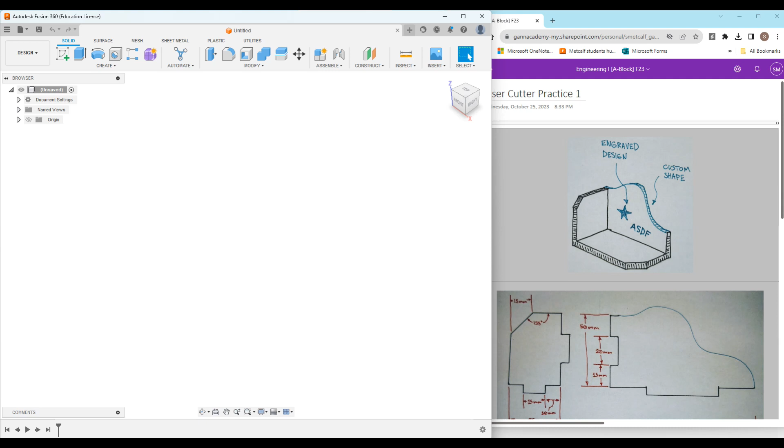In this video, I'm going to show you how to make a simple laser cut design in Fusion 360 using a technique that I call multi-plane sketching. Let's break that phrase down.

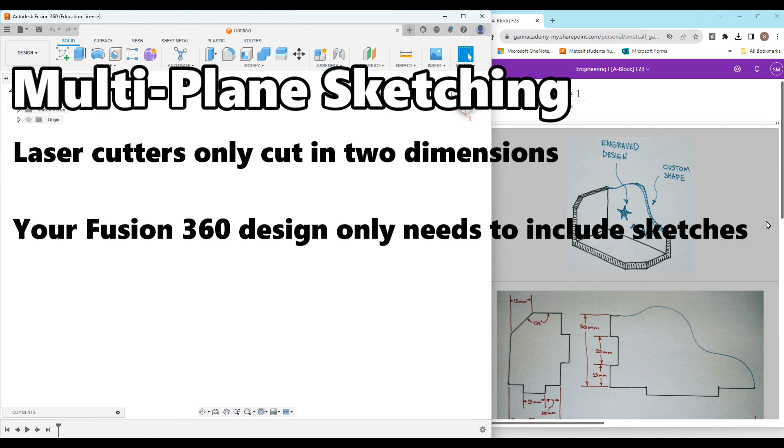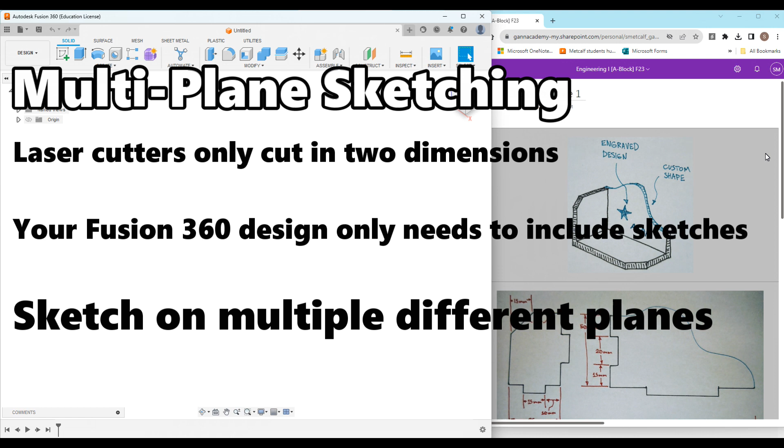Laser cutters only cut in 2 dimensions, which means that your Fusion design only needs to include 2-dimensional sketches. But when this design is assembled, it will be 3-dimensional because the parts do not all lie on the same plane. Therefore, when we design it in Fusion, we should sketch on multiple different planes, both so that we can see what it will actually look like and because this will help us make the design more accurate.

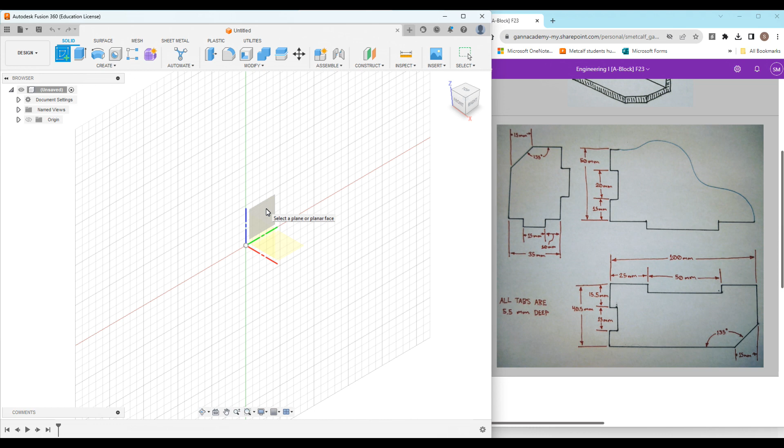You can see that the 3 pieces of this design fit together with tabs. Tabs are a common laser cutting design feature that ensures our pieces fit together in exactly the intended positions. I'm going to start in Fusion by creating a sketch on the YZ plane. In this sketch, I'm going to draw out the design for the left side panel of this assembly.

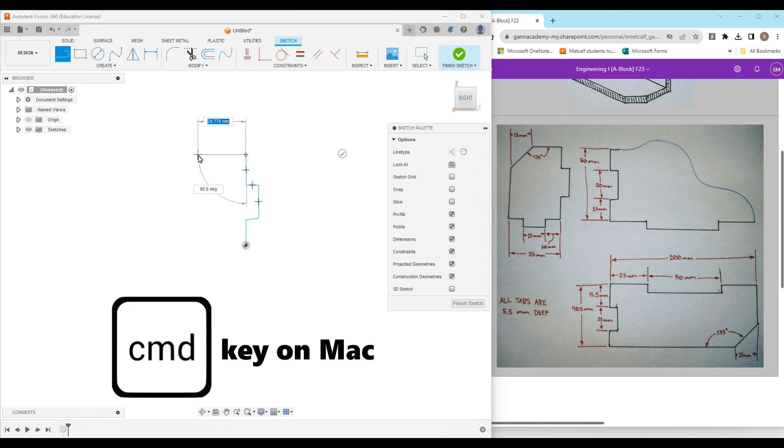I'm going to get the line tool and click on the origin to start. Now I'm going to hold down the Control key so that Fusion does not add any automatic constraints while I am roughly sketching in the shape of this part. You can see that many of my lines are at weird angles and definitely are not the right size, but that doesn't matter. First, I'm just going to get the geometry that I want into the program, and next I'm going to tighten it up using constraints.

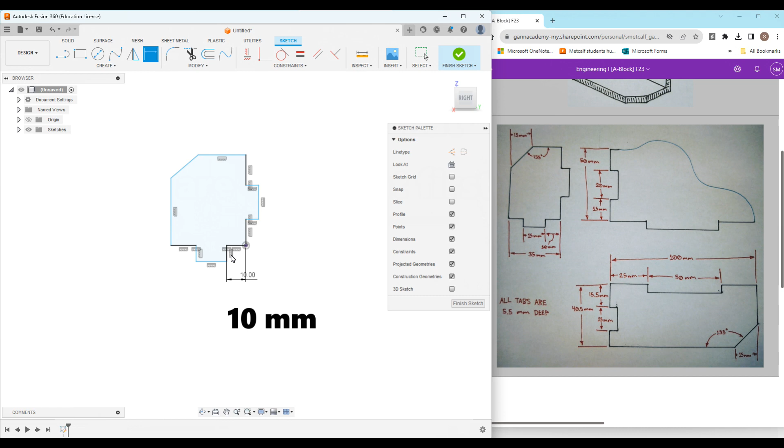I like to use the horizontal vertical constraint first because many of these lines should either be horizontal or vertical. After applying the horizontal vertical constraint to my lines, I'm now going to use it on points to further align the drawing. Now I'm ready to use the Sketch Dimension tool to start adding dimensions from this diagram. For the vertical positions of these tabs, I can look at the sketch of the back panel of the design.

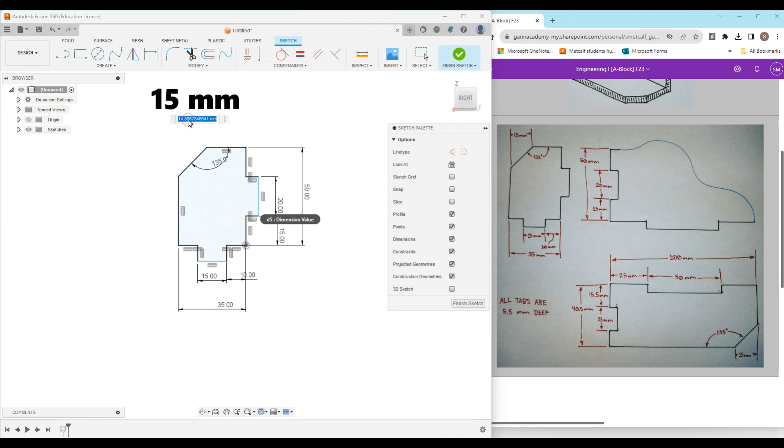You may notice I still have some unconstrained lines. That's because the depth of these tabs is not specified in the dimensions on the sketch. However, you can see a call out on the bottom left that says all tabs are 5.5 millimeters deep. The reason all tabs have this depth is that we will be laser cutting this design out of 1/4-inch plywood, which is approximately 5.5 millimeters thick. The depth of the tab must be the same as the thickness of the material so that the tabbed pieces will line up perfectly when assembled.

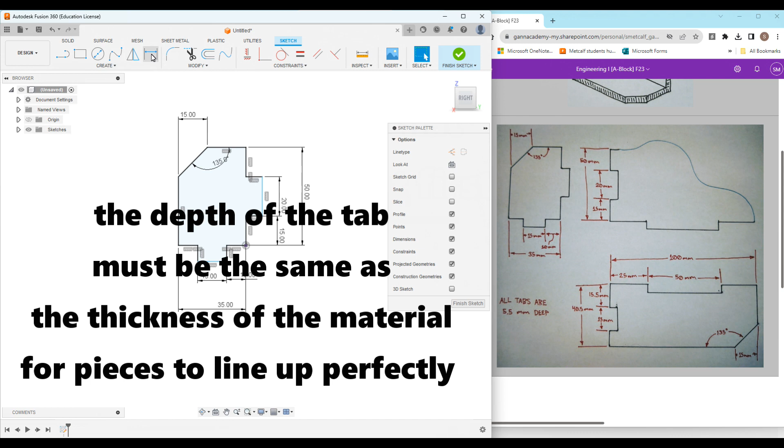After setting this dimension to 5.5 millimeters, I can use the equals tool to make the other tab the same length. I have now fully constrained my first sketch. I'm going to right-click and rename the sketch to left side. I'm now going to finish the sketch and begin a second sketch on the XY plane. My goal now is to draw the bottom base of this design.

Once again, I'm going to take the line tool, hold down the Control key, and loosely sketch in the lines that I want for this part. Now I'm going to use the horizontal vertical tool again to make the lines that should be horizontal and vertical in the correct orientation, and I will use the horizontal vertical tool between points to further align my design.

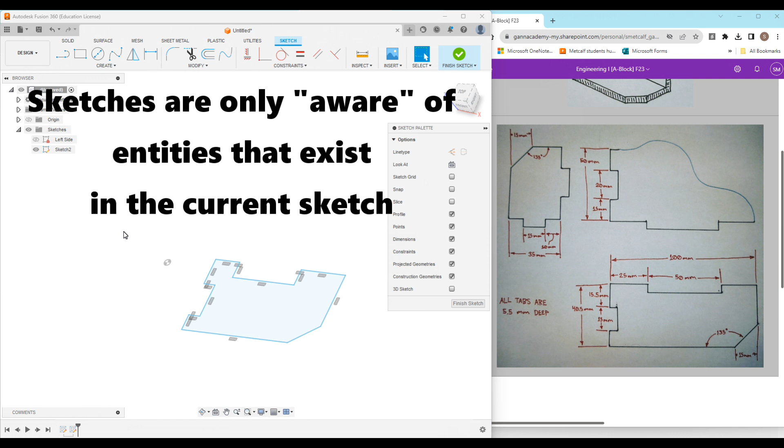Now, before I start adding dimensions, I need to explain something about sketches. We are currently working on sketch 2, and we can see the left side sketch that we already completed. However, from the perspective of sketch 2, that left side sketch doesn't exist. Sketches are only aware of entities that exist within the current sketch you are working on. If we tried to attach something to the left side sketch, it wouldn't work because to the sketch that we're working within, the left side sketch doesn't exist.

This can be frustrating. However, Fusion includes a tool to help us relate sketches to existing geometry. That is called the Sketch Project tool. It is available at the bottom of the Create menu or by pressing the P key on your keyboard.

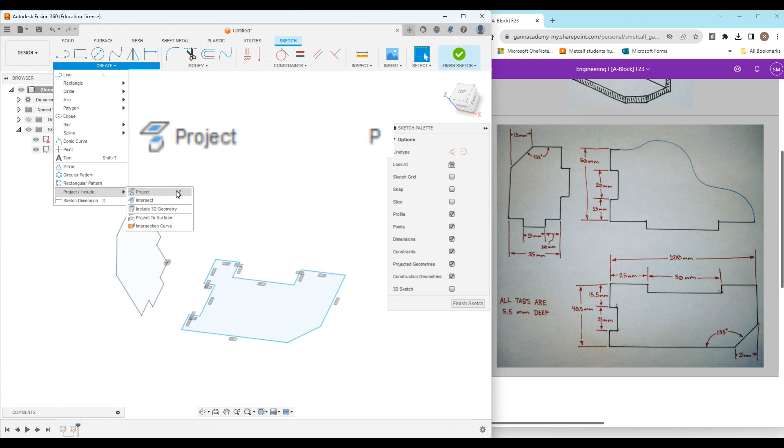Using the Project tool, I can select pieces of geometry from another sketch or body that I want to reference in my current sketch, and after pressing OK, you can see little purple dots have appeared. Not only have these points turned purple, but if I hide the left side sketch, the purple points are still visible because they are now a part of Sketch 2.

I can use these points for constraints and dimensions in the same way that I would use a sketch point I had created myself. So, I'm going to use the coincident tool between a line and a point. If I select this projected point with the coincident tool, and then select the front edge of my Sketch 2 shape, my Sketch 2 shape will move so that the bottom edge is lined up perfectly with the point I selected. I can similarly select one side of my tab and the other side of my tab.

You can now see that these three lines, which I used the coincident tool on, have turned black. They can still be moved side to side, but they will not shift out of alignment with these projected points. Furthermore, the bottom corner of this tab should actually be directly attached to those projected points. I've now saved myself the trouble of dimensioning this tab into place because I referenced the dimensions that I already drew in my previous sketch.

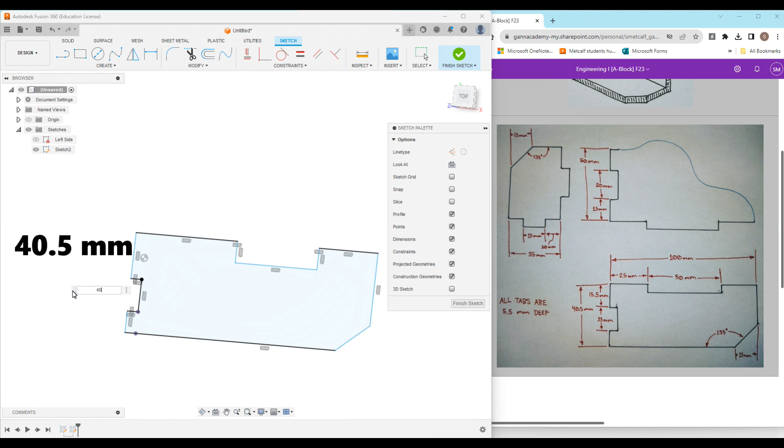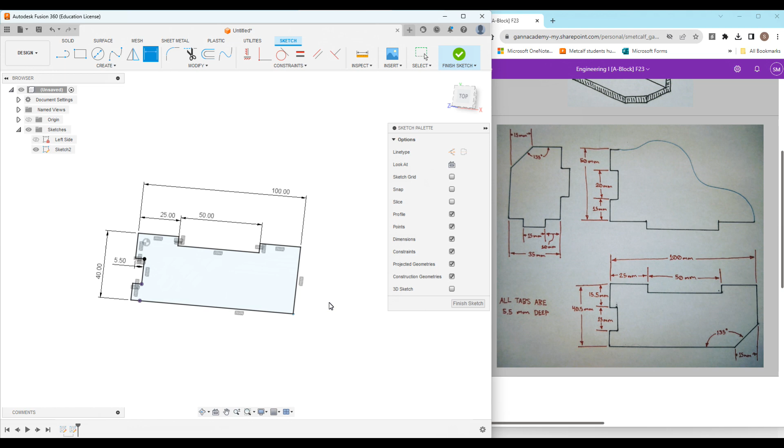I'm now going to use the dimension tool to finish up this design. Remember that all tabs are 5.5 millimeters deep, and that we can use the equals tool to make all tabs within the same sketch equal to one another. As I added dimensions, you may notice that my angled side has shrunk away to almost nothing. That's okay. I'm just going to grab one corner and drag it until it looks a little more similar to the desired shape, and then I'm going to use the dimension tool to make it the exact right size.

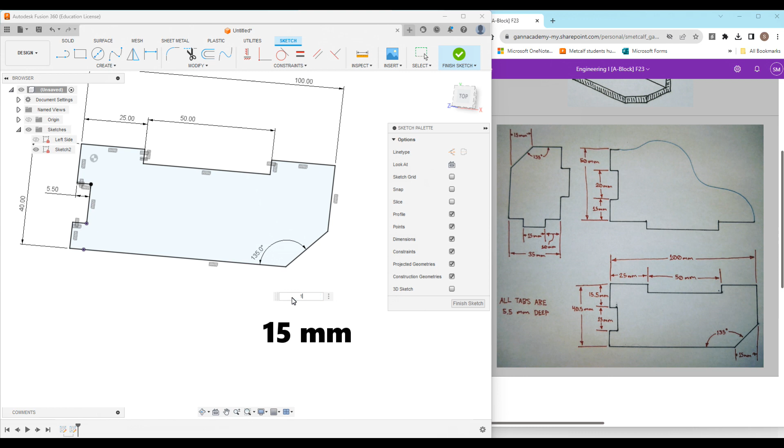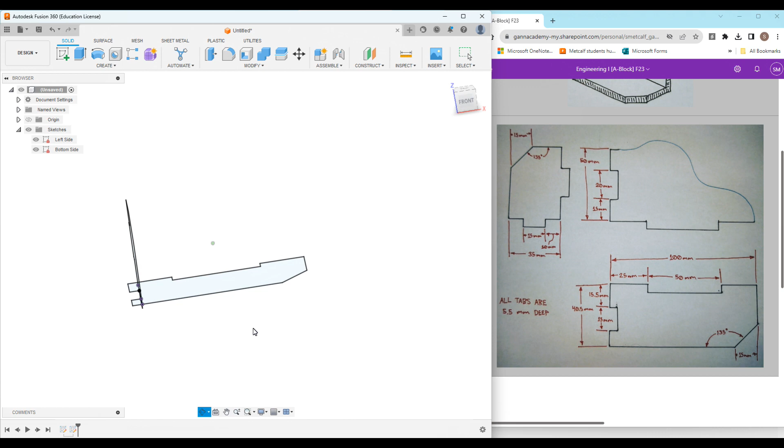My second sketch is now fully constrained. I'm going to finish the sketch, right-click on it, and rename it Bottom Side. So you can see I now have two sketches floating in space, intersecting with one another at their tabs, just like they would as real laser cut parts.

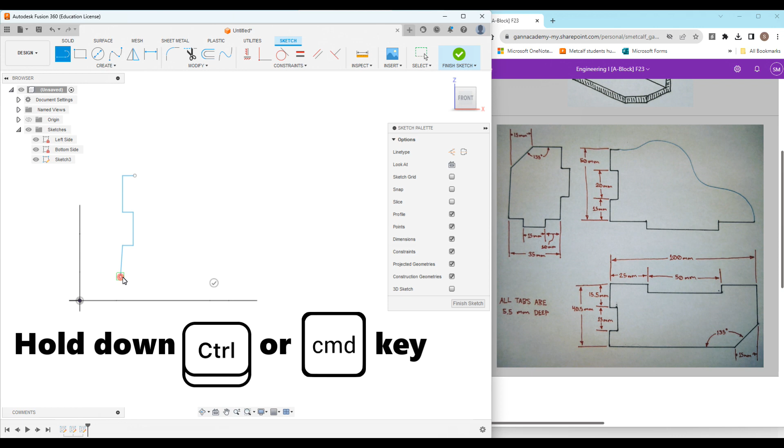We have one more side that we need to sketch before we're done. So I'm going to create a sketch on the XZ plane. And just like before, I'm going to use the line tool to roughly sketch out the geometry that I want in this part while holding the Control key so that the program does not automatically add any constraints that I don't want. And again, I'm going to use horizontal vertical to straighten up some of these lines and to align them with one another.

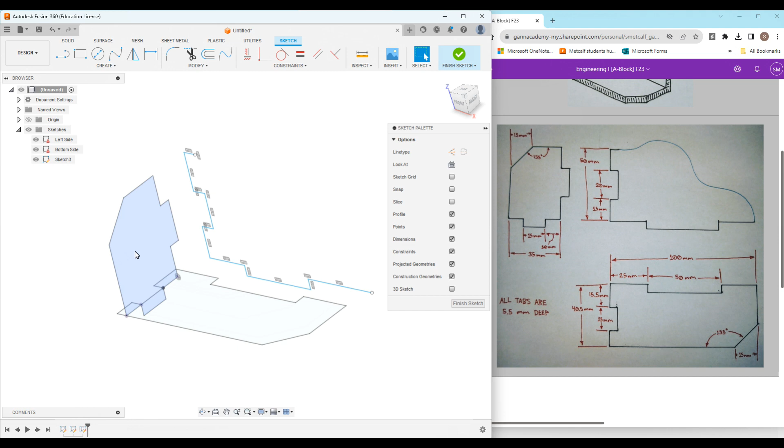I'm now going to hit the P key on my keyboard to bring up the Project tool, because between the left side and bottom side that I've already sketched, I'm not going to need to add hardly any dimensions to this third part. When I click OK, you can see a bunch of purple points have appeared. By using the coincident tool, I can quickly and easily line up parts of my design exactly where they should be.

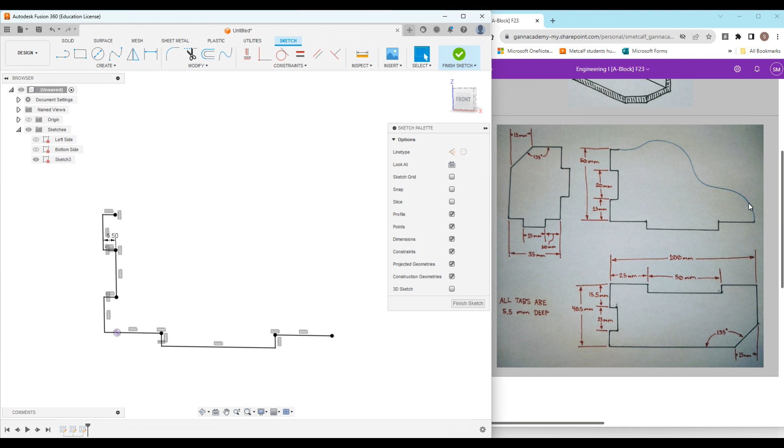The only thing I need to dimension is the depth of my tabs, which is once again 5.5 millimeters. Now all I need to do is add my custom shape to the back. I'm going to use the spline tool for this. And in this example video, I'm just going to draw a wave like the one shown on the diagram, but you should feel free to draw any design that makes you happy.

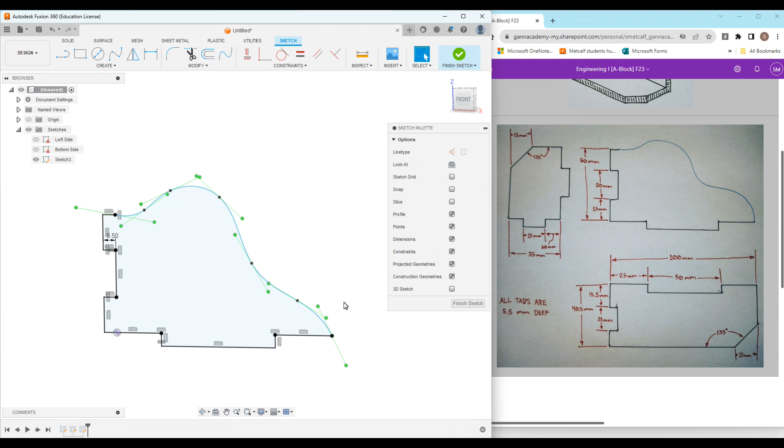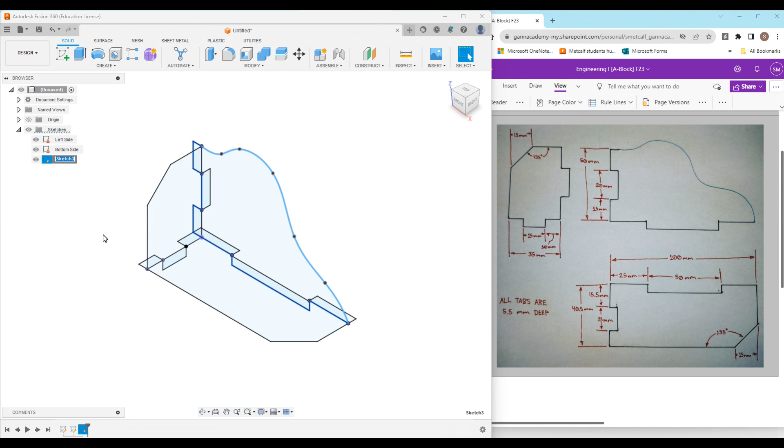This sketch is not fully constrained because constraining a spline is very challenging, but all of the critical geometry is constrained. So I'm going to hit Finish Sketch and unhide my other two sketches. It can be a little bit tricky to see, but all three of my sketches are aligned with each other in space and have matching size tabs that should ensure this part fits together correctly after we laser cut it. The last thing I'm going to do is rename the third sketch as something recognizable, and this design is now ready to be exported for laser cutting.